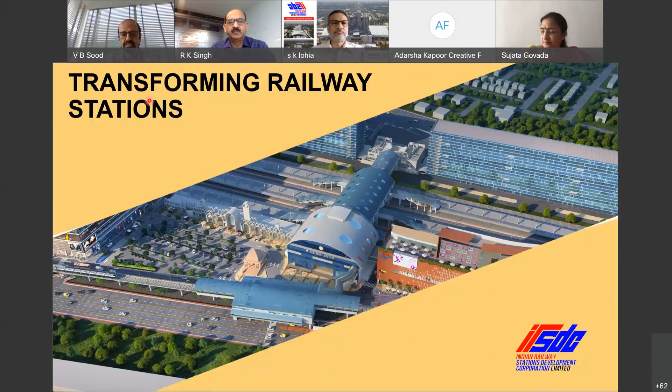Our vision and mission talks about sustainability, use of technology, and many things. And the task that has been given to us is that we have to mobilize the funds from the market itself. So it's a very difficult task, and that calls for a lot of innovation, a lot of listening to the people who are planning the cities, those who are the developers, those who are going to invest in the station, so as to understand those viewpoints and incorporate all of that in our planning.

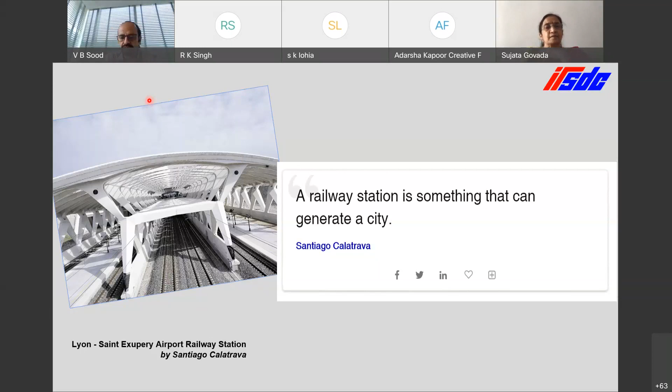This is one of the overarching philosophies, that a station is a very important part of a city. In fact, if the station comes first, it's a nucleus around which the city grows, or a magnet through which the city will gravitate. A station is a very important and integral part of the city, and something which actually serves the city, and of course gets served in turn, but it serves the city very well. People of the city closely identify the stations with the cities, or vice versa. So that close bonding is there, and that is what we are trying to do in our station...

redevelopment. So a bit about IRSDC: it is a joint venture of Rail Land Development Authority, IRCON, and RITES, with shares of 50, 26, 24, and we are around 9.5 years old as a company.

Currently, we are the nodal agency for the station development program as per the approval of the Union Cabinet, and also the main project development agency. We have the powers to approve our plans, layout plans, building plans under Section 11 of the Railways Act 1989. Whatever planning we are doing has to be harmonious with surrounding areas, generally follow national URDPFI principles, and we have to consult urban local bodies to ensure this harmony. Whatever development we are doing is covered in the definition of a railway under Section 11 of the Railway Act, so there is no need for a separate change in land use across India.

It's not required. We have also been given powers as a zonal railway to approve the plans for the station, for the operational infrastructure at the station. So those powers are also available with us, and we have already started working as a planning body.

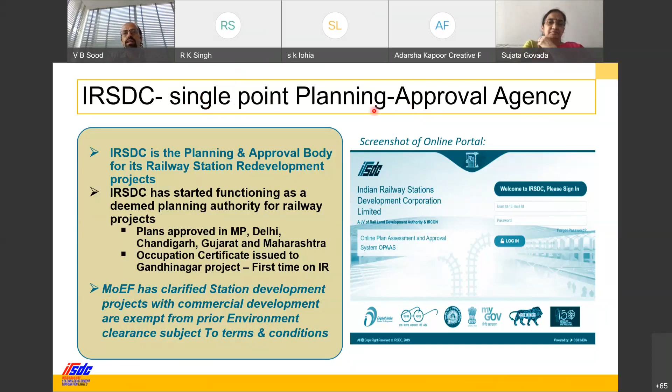One important aspect is that the Ministry of Environment and Forest has clarified that station development along with commercial development falls under the same definition of railway, and is exempt from prior environment clearance. What they have said is that we have to get an environment management plan approved, which is again a simplification. But the net result is that we are now the single point planning and approving agency for station projects.

Now our focus of redevelopment is on the passenger and the city, so a framework of 7 Cs has been made for how we want to go about doing this. We are designing so that it is congestion free - the station road and the area around the station should be congestion free, and the station premises themselves should be congestion free. They should be convenient; there should be conservation of the natural built environment and heritage, cleanliness, communication so people understand the next step to be taken, convergence of modes, and creating a city center.

So it's about the city center character of the railway station. The stations are already at the center of the city, but in most places they don't have the character of a city center. So we're trying to bring in this character so that stations perform multiple functions and not just the transport function. What we are trying to do is organize the external entry to the station.

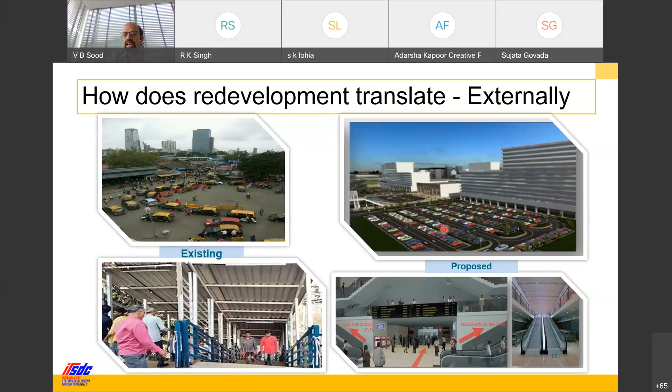And internally, we want to change the scenario where people are waiting on the platform. Rather, they should wait at concourses, at waiting areas removed from the platform, where people are comfortable before the train comes, and then they board the train and go. So we're trying to change this kind of scenario.

This is the idea of congestion-free design, and in this case there is a metro, so we have given an aerial skywalk directly integrating the metro concourse and railway concourse in both directions. People don't need to change levels; they can directly go from station to metro and metro to station. This is one important aspect.

The other is this concourse - a large area where, whether you come from this side or that side, either way you reach this same portion. So all the facilities available here can be used by everybody.

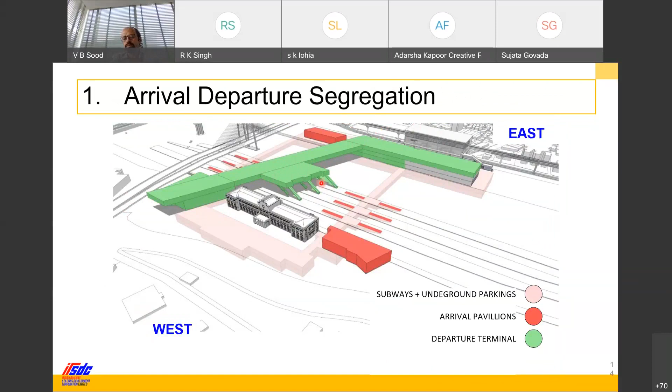So we can see that we have a large number of seats here. These passages are there, these are the gates where people can get down. And then we can have our urinals, the water, some retail, some other facilities, all can be provided on this floor.

This becomes a comfortable place, and this is the image basically of the railway station which people carry, because all others are just transit. This is where people sit if they have time. If they don't have time, they just rush through this part and go.

India being a dry and hot country most of the time, 7-8 months a year - of course it can get cold also, but heat is more of a problem. Cold people can take care of with their clothing, but heat is a big problem. So this helps in countering that, and also it helps in visually connecting all the elements. So this platform, this concourse, all these areas are actually connected together, and the station comes as a unified whole.

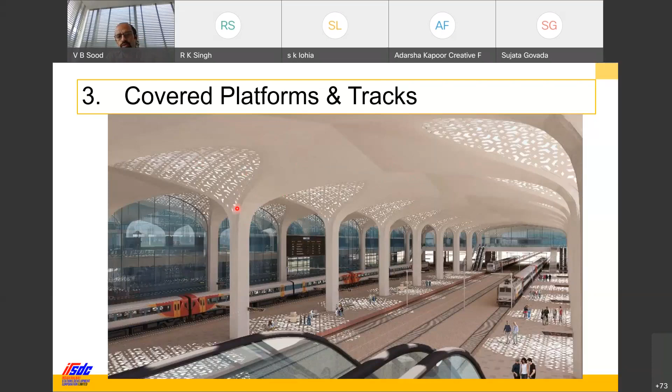So we're just trying to put in some elements so that the design is good, and even a person transiting will appreciate that this is the kind of work done. In this case, this was a heritage station, so the work done here is talking about our thoughtfulness to the aesthetics, to the way the station is presented to the people.

Okay, so a very common question - I don't cover this part, this is Urban Connect, so all of you know this. One concern that almost everybody has is that stations currently are congested, so we are doing more real estate and more development in that area. Will that not lead to more congestion? So we are actually trying to tell everybody that these are not two competing claims, these are not two things which are causing problems to each other.

If we do good planning, then the station complements the real estate because a lot of footfall is there, which the real estate can utilize. And the real estate brings in lots of uses which the passengers can utilize. So ultimately, these commercial functions should add to the passenger experience. But what that requires is one thought process which goes into all the development, and we come up with a comprehensive plan with a thought on how exactly we want to run this whole premises. And then we never lose sight that it is a station, but then the real estate also flourishes. It is not like an afterthought or an appendage which creates problems or issues.

So this is our approach, which we hope will be able to do justice to all the competing claims which are there on the land in the station area.

Our planning process - this is the flow chart of the planning process. So when we start, we collect the data from railway to understand how railway is going to evolve over the next 30, 40, 50 years. Then we see the city - what is the planning of the city as per the master plan bylaws, what the city is trying to do in this area. Then these two things, plus we try to understand the site. We do the surveys of the site, survey of the passenger, survey of the traffic, so how exactly people are using these premises and all other physical features.

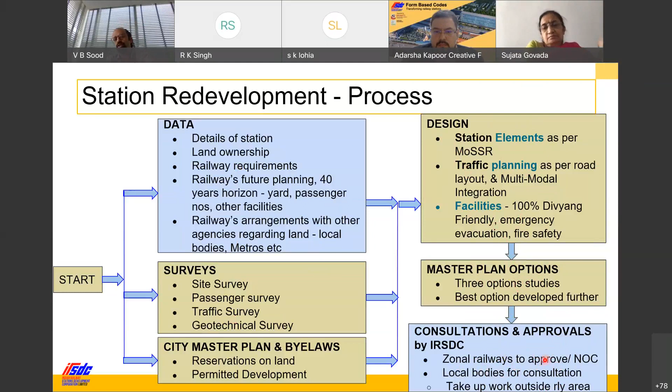We understand that doing whatever we are trying to do is a win-win paradigm. The stations are congested, stations are underutilized. If you want to utilize them properly, this prime asset which is there in the heart of the city, we want it to be a nucleus for development in the surrounding area also. All this development is on the TOD principle, so that the burden on transport infrastructure is reduced.

So this is the fundamental part. We want the station areas with real estate and all should be a welcoming area. It should be a safe area. We should have active streets, eyes on the street, flexible mix of uses. And we want to promote and prioritize pedestrians and non-motorized transport. These are the requirements, and because it's a station area, they are all the more important.

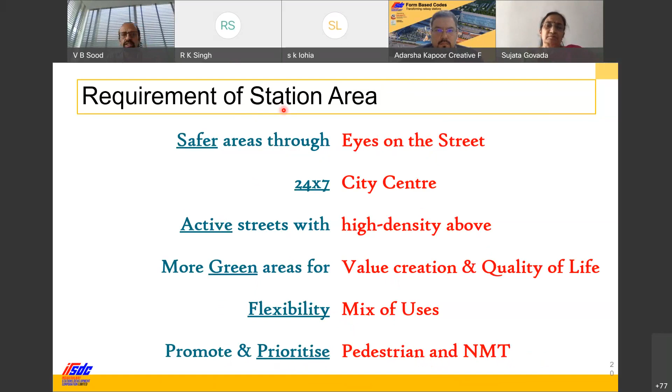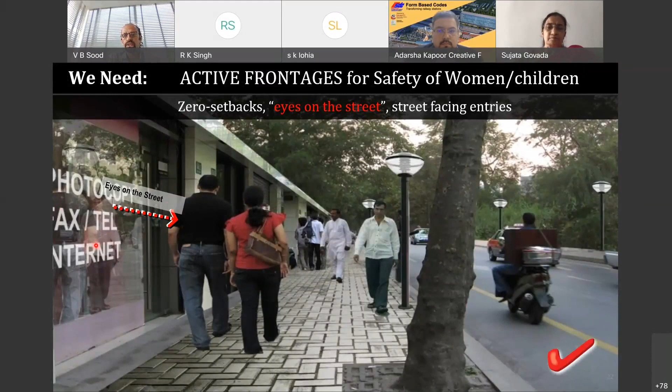Because of these requirements, we had these codes so that the station area develops as per the unique requirements of the station. So there are 6 codes.

One is the handbook for how the station should be planned, how the national TOD policy component should be operationalized in this area. Then form-based codes, which basically convey our vision, whatever we have done in the station or in the whole area, get translated into this requirement as a form-based code. Then there are codes for design, for control of the development in the individual buildings, and green building and heritage — very, very important. So these two codes are for green building and heritage assets.

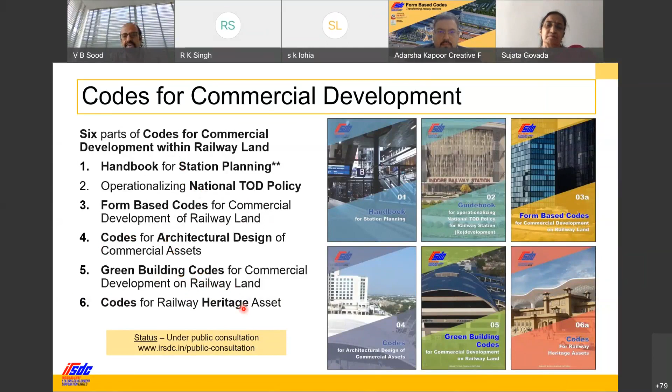So these codes are under consultation, as MD sir was saying. They were launched on 19th of April. We had a very big gathering on that date, more than 1,000 people were there. Then we have already had consultations with the town planners, with the architects, green building consultants, heritage consultants, and today we are doing consultation with the urban designers also.

A couple of projects that we have done, where some of the elements of this vision are already visible. One is this Habibganj, in Bhopal, central India. Here the existing station is there, and we have conceptualized this new station, which is surrounded by these commercial developments all around.

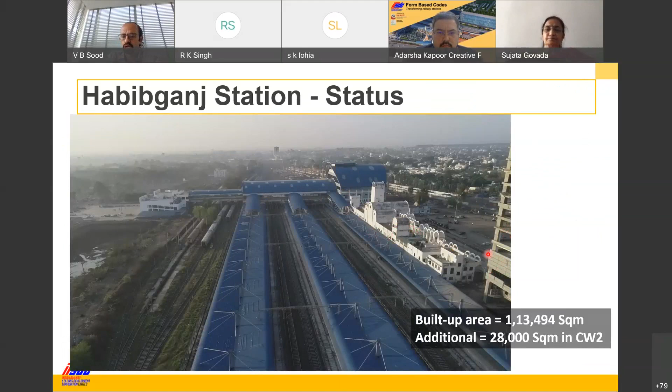This is the station — the first station handed over to a private developer in March 2017. The station has been run by the developer since then, and this is the current photograph. We can see that the new station is almost ready. This is the existing station, and this is the commercial building which has also come up. More views: new building, existing station, and the commercial development.

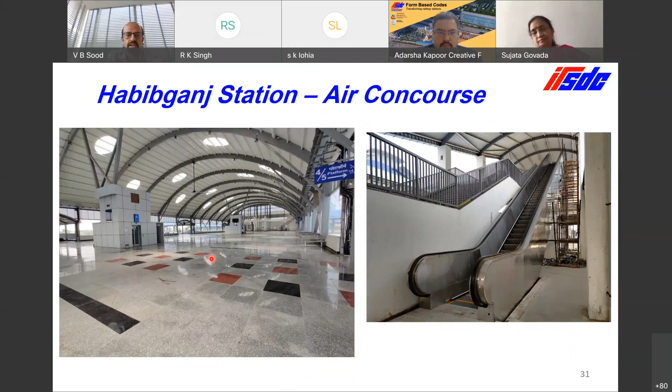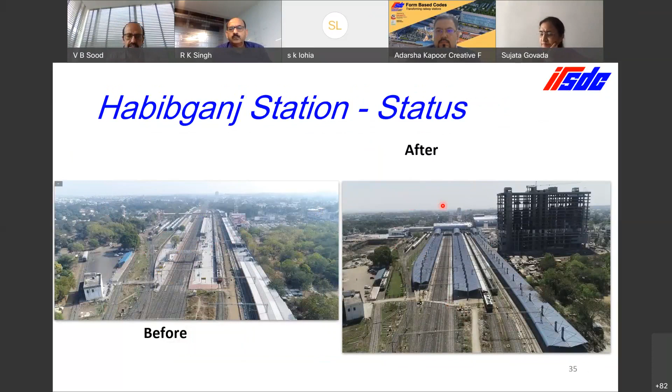We can see the development — how the station that we took over in 2017 looks today. A lot of development has taken place here, and this is the first redeveloped station in India on the lines that we are describing. This is going to be inaugurated, and then we'll take the feedback and adjust the model based on how the passengers are using it.

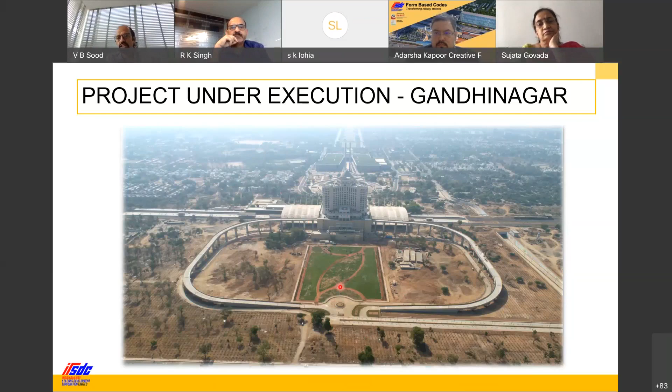Final testing of the different facilities, that is what is going on. And more views—we can see this 99-meter through-roof which covers across all the current and future platforms and tracks. So it spans right through.

And we have got two subways in this case also. This is the level where the concourse is, so we can have the segregation going here also. And the hotel, we can see on the inside.

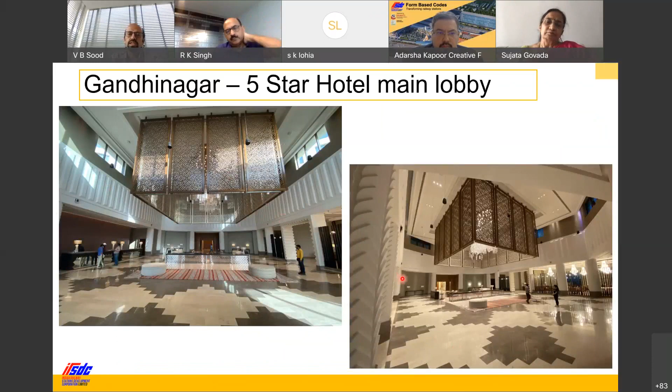This is the hotel, this is the main lobby, and these are the dining areas—holiday dining, lounge. So the station and this hotel are also ready and will go into commercial use next month.

So both these projects are unique, and this is the kind of development that we are seeing. We'll discuss the various elements of these projects in subsequent presentations. Thank you.

Thank you, Mr. Vivek, for briefly telling us about what all is being done in IRSDC, and briefly telling us about our two projects which we have recently completed, that is Habibganj and Gandhinagar.

Our next speaker is Ms. Paromita Roy. She is an urban design and planning expert in IRSDC, presently on deputation from DDA. Paromita Roy is an architect and urban designer with over 20 years of experience leading and implementing large-scale projects across the globe, integrating urban planning with infrastructure and resource management, sustainable mobility, built form design, and economic viability at various scales, embodying a multidisciplinary approach to urban design. She is a specialist and expert in transit-oriented development. I would now invite Ms. Roy to present the form-based approach adopted by IRSDC while making these codes. Over to you, Ms. Romi.

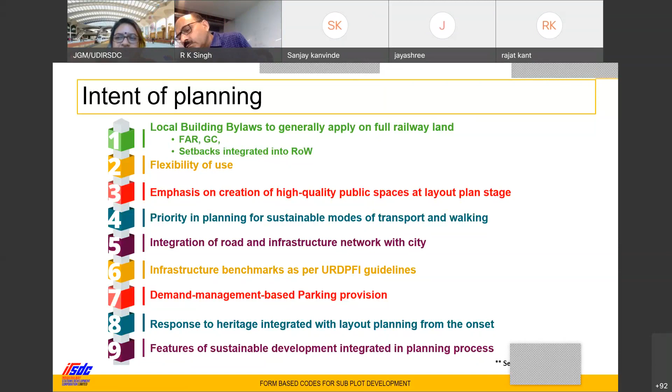It's not just about doing public spaces for the sake of public space, but actually creation of public spaces and regulating and taking away a bit of space from cars parked in front of stations actually adds value to your development, increases the quality of life of passengers, and when people like a place, it's going to have better commercial value.

So this all eventually links up to better commercial value and better quality of life for people. They are both interlinked. Then response to heritage, we had a separate session yesterday, a very long one, about the heritage aspect, and this is again a very important aspect we're looking at in all our plans.

Many of our stations are heritage buildings, old buildings. In some which don't have very high heritage value, we are nicely integrating them into modern buildings, and with the listed heritage buildings, of course, we are restoring them. We have kept very comfortable budgets. We have got heritage consultants who come and do quick audits and give us budgets, and those have been integrated into our overall business plan and as part of our project RFPs. So heritage and refurbishment is also a very serious part of what we are doing.

And last but not least, the sustainable development planning process, which is part of the urban design framework. In fact, IUDI, Arunava, he had come and helped us put this together, and Mriganka and a lot of other urban designers have been helping us behind the scenes, and we are very thankful for that. That has really helped us develop these codes as well.

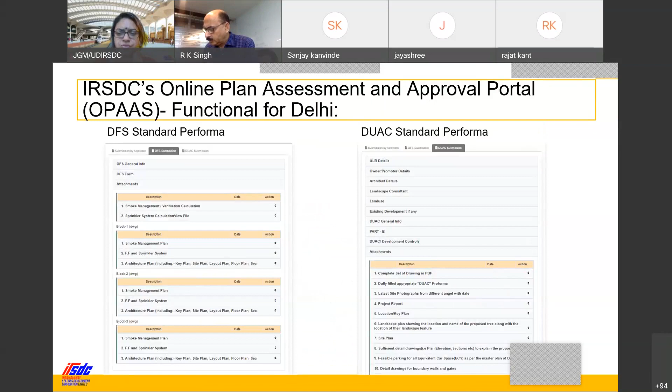So these are the proformas, just a screenshot of that. I'll not get into these details because I think everybody here knows much more about it. I'll quickly take you through the steps I've explained and hand it over to the next speaker.

Of course, it's integrated with the land use, so I'll skip that. Now, how does the bridging happen?

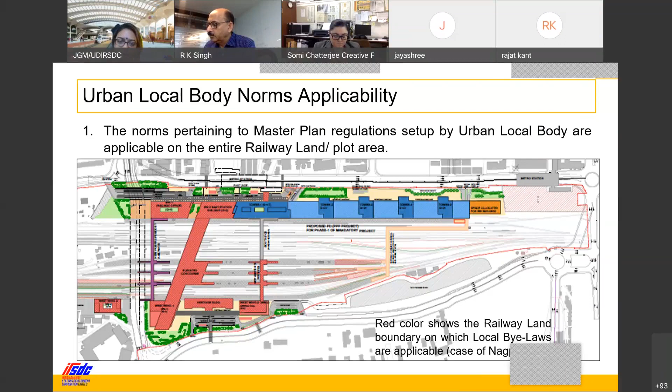Of course, the overall layout is also part of the RFP package, but that is more like what we call mandatory works - roads, greens, and station areas that the concessionaire has to build and maintain on behalf of railways. But the subplots we're talking about are the ones he uses for monetization. Not only monetization, these also have a huge contribution to the quality of space and quality of life in these precincts.

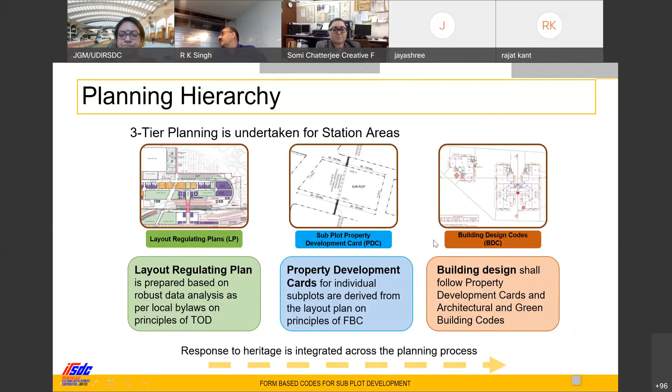We follow a rigorous process of doing surveys, assessments, opportunities and constraints, then come up with the strategies. We generally do around 3 options. After the options are prepared, we take it to the PSMC meeting - there's a plan approval committee in IRSDC - and after that, the committee approves it.

Then we send it to the railways and the local body. This is all based on the urban design framework plan that I mentioned earlier, that has various aspects that we look at, and then the final layout plan of the site is prepared. This is like a graphic tutorial that is there in code number 2, which talks about the process of planning.

Very often we would find consultants would come with just identified plots in the railway land, and then just say, this is for monetization and this is the station. That was a big challenge - we had to put this thought across, that it's not an isolated commercial development and an isolated station development. It is very much seamless. If we don't integrate it with the city, it's neither going to sell, nor is it going to serve the people.

So this graphic process is there in the code, and detailed codes of these aspects are also there in the various codes that are there for publishing. Step by step, connecting to the context, putting in the road network, which connects to the surrounding nodes, the multimodal integration with surrounding nodes like bus, metro, other stuff, often freight also.

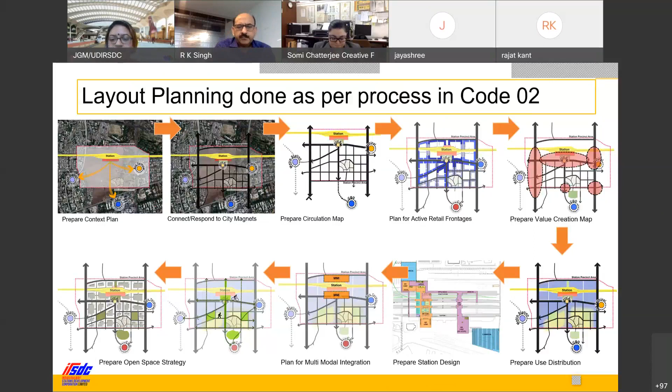We follow a pretty scientific and rigorous process in coming up with the numbers, the sizing, the figures for passengers, and that number impacts the design and the sizing of various aspects within the plan. So then the process of basically coming up with this, which is the urban design scheme, and the layout plan for the project.

The final regulating plans have two levels - the first level, which is the layout plan level, is this overarching level. There are various layers in this. We have devised these layers which are very simplifying, otherwise one single drawing has too much information, so it's difficult to filter out. The person who's making the street may not be interested in looking at what's happening in the subplot. So there is one overall layout plan, and then we also have these layers.

The green layout plan talks about the green layout and also what norms are going - like how much percentage of soft surface, if any commercial is permitted in the green, how much of soft surface, what are the pathways. In this, you can see that we have this came from the urban design framework for the Chandigarh project, for example.

You can see that there's a road network there. I'll use the highlighter. Yeah, so there's the road network here. And through the parks, we have given these pathways because here there are railway offices where a lot of people live - this is a railway colony.

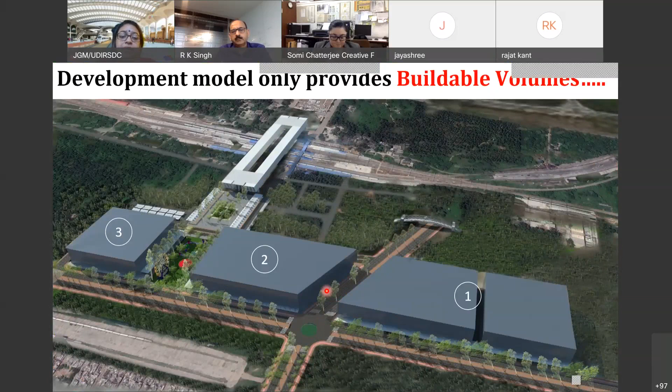Then we come to the property development card, which is at the subplot level, the smaller level that I talked about. For that subplot level, I've just shown the Chandigarh example. So you can see what is going into the code or the RFP, and from that he can make anything out of it eventually.

But we have specified that he has to give an arcade which connects to the station walkway and also responds to the activity happening on the main road. This is drawn, of course, from local things in the Chandigarh RFP.

So we gave him these samples, like the Sector 17 arcades, which connect the entire Sector 17 market and all the buildings in a continuous arcade. So that character is already there. This is part of the form-based rules.

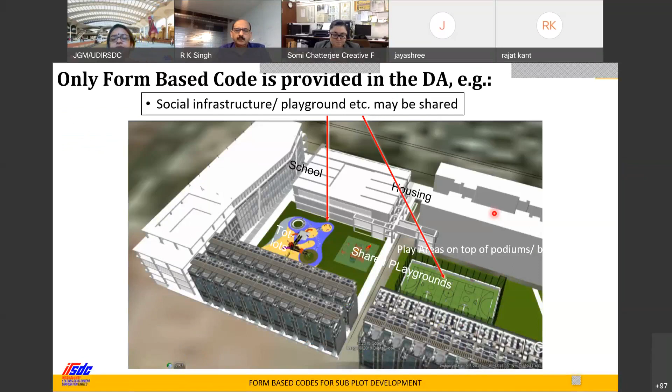Then, allowing sharing of green areas, a school playground and a tot lot or a swimming pool or a tennis court can be shared between the housing and the schools within the same block. These aspects are looked at.

Now, I think if all of you have looked at the property development cards, I'll just hurry up on this because it's a lot of slides.

At the subplot level, the parameters that I mentioned that the buildable volume card has are these five very important parameters which go into our RFP documents. One, of course, is the volume.

This buildable volume defines the amount of development he can do. And there are certain assumptions of ground coverage taken for calculating the optimum amount of built-up area that can go into the plot. And that is also part of the RFP.

Here you can see that in most cases the subplot plot line is the same as the build-to line of the building. Somewhere it is not - in some places we want a gap for some reason. So there the build-to line may not be at the red line, but in most cases it is.

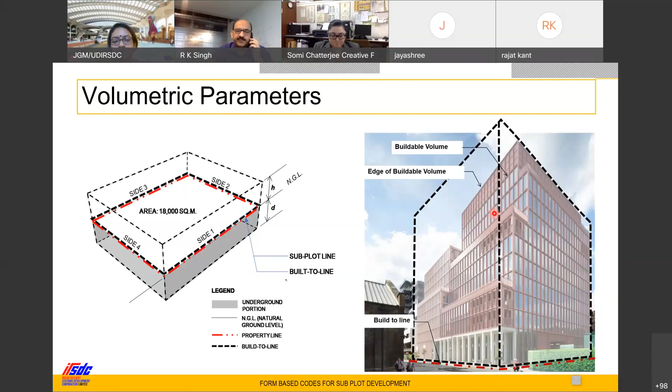Then the second parameter of the form-based code is the edge condition. This has mainly two parameters, the active frontage and the colonnade. So in hot areas, we want, especially where we are expecting passengers coming out of the station and walking through, or general people walking past in heavy numbers...

There we have mandated climatic protection in the form of arcades. This is not always mandated - where heavy footfall is not there, we just write optional. But where heavy footfall is expected, we write it as a mandatory element.

And then same with active frontage, we all know, having retail or active - even if it's residential, active frontage doesn't always mean shops. It can even be residential, but you will need townhomes and buildings which open up to the main arcade or the main street. So your entry has to be from the active frontage side. That's the second parameter.

The third parameter is bridging over ROWs. This is something that was very common traditionally. I don't know how we forgot all these good things that were there in our traditional developments. So they are sort of all being brought back, and as we know, it has so many benefits.

Like in the bottom picture, you can see this is not only connecting two building floor plates, it's also connecting a floor plate or two buildings across the train tracks. So this creates a wonderful interconnected, easy-to-move-around environment for people working in these areas - you may be working here, going for a restaurant there, or living in that hotel, and going for a drink with your friend in the other building.

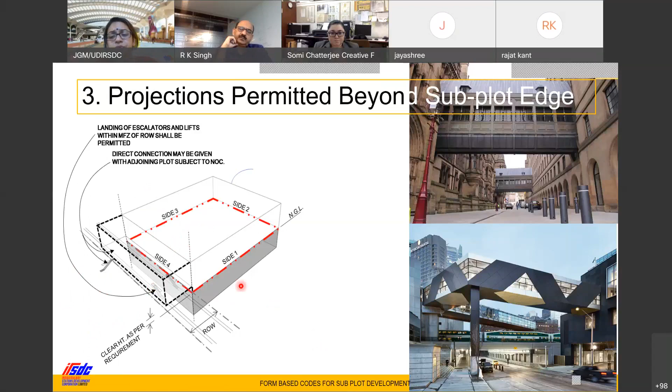The fourth aspect is the wayfinding feature, which includes clock towers and the wonderful things we read about in college. We've been talking about it for decades - the Kevin Lynch aspect of having view corridors and being able to see the station from a distance.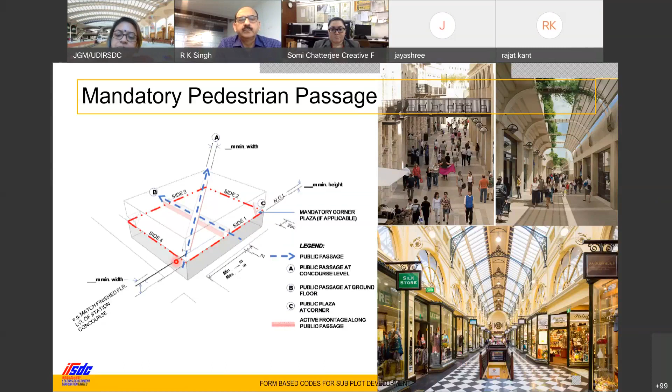Before going home, all the shopping and grocery shopping can be done right there in the station. You simply catch the bus or auto and go home after that. So it's a win-win for everyone. These 5 aspects are part of the form-based codes that are put in our RFPs.

These are just snapshots from the RFP documents, explanatory shots. This code is actually part of the RFP, where we've mentioned that wherever active frontage is mandated, you cannot have a boundary wall. You can have a slightly higher plinth for privacy, but you have to have at least 50% transparency. This demonstrates how that is calculated. These aspects are part of our codes.

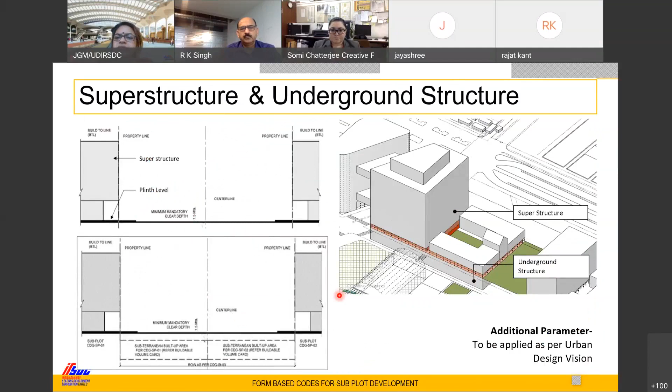Common areas also - what kind of walkways and such, which I showed in the Chandigarh example. Some examples of how the structures are interpreted in this. Street regulation cards I've already explained, but I'll just show you these snapshots of how it works out.

So the key thing is integration. At the layout plan level, all three things we talked about today - the streets, the MPP which is the mandatory pedestrian passages, and the pathways inside parks - they all have to make sense and interlink with each other.

Like we often see in our city, the zebra crossing is in one place and the median cut is somewhere else. That should not happen. So this is a very important part of the layout plan process, which then informs the smaller property development cards that go into the RFP documents.

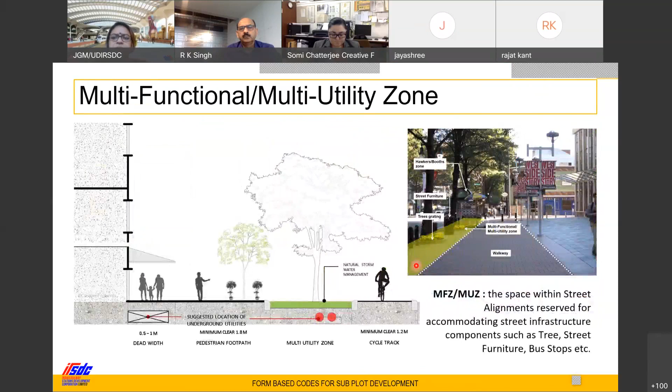Just some illustrations of that. I think all of us know these in fair amount of detail, and a lot of experts are here, so I'm not going to jump into too much detail, but just to show you how we have codified these very generic, general, but very important aspects in our property development cards.

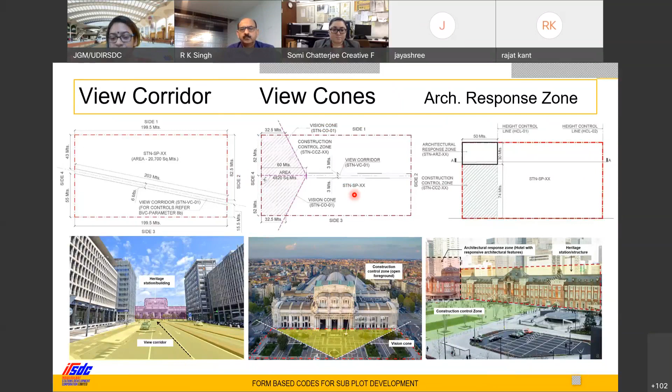So just how the view corridor works - this is very important because for heritage stations, we have had to specify that the vision cone means the plaza must be this size. We've written in our document that you cannot even put parking in a way that blocks the view of the building if it's a heritage or important building, because otherwise cars parked up to 2 meter eye level would block the view - either a boundary wall or a parked car ends up blocking your view of the building. So these are some codes and samples for view cones, height controls, etc.

This is Adarsha. Would you like to talk about the heritage part?

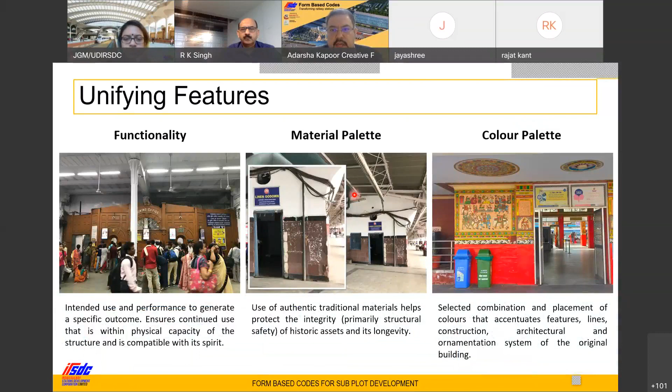Very briefly, these are some of the responses to the heritage stations - you can skip ahead, Somi. I think we'll not go into the details, we've taken a lot of time. So only on specific stations where we need to get into the details of how the surrounding development responds to the heritage station, we'll go into these kinds of details. The idea is that these codes lay out a palette of parameters, and based on the requirements of the station and the subplot, the technical consultant appointed by IRSDC, who leads a team of experts, will go into the details and specify these specific norms for each subplot.

The key thing to note is that heritage is part of the urban design process, and so is landscape. That is an important takeaway I would like to focus on. With that, I will close my presentation. Thank you.

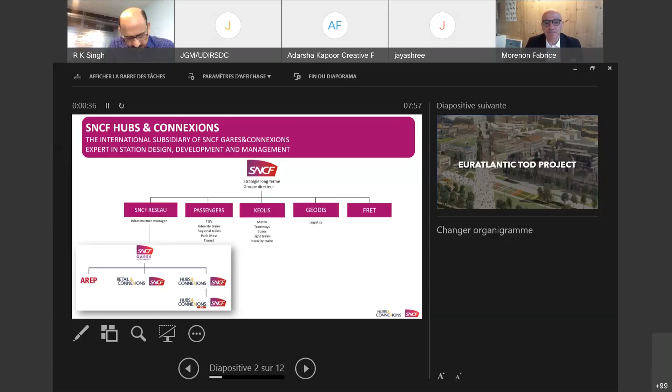As I told you today, I want to discuss and go through the Euratlantic TOD project. It's in France, in the south of France, as you can see here.

Oh yes, here. So here you have Bordeaux, it's in south of France. Here in the middle of France is Paris. Can you see the screen? I'm sorry.

So we decided to refurbish the station for the arrival of the high-speed line in June 2017. As a matter of fact, it was a refurbishment of the station, but also a redevelopment of the whole area around the station. Because when we redevelop a station, we consider not only the building of the station, but we decide to redevelop the whole neighborhood. It's very important to be in this mindset, and I know that you are also in this mindset.

Bordeaux is very interesting because thanks to the high-speed line, now you can connect Paris to Bordeaux with only a 2-hour journey by train. It's very interesting, especially for business travelers who can go almost in a daily journey from Paris to Bordeaux.

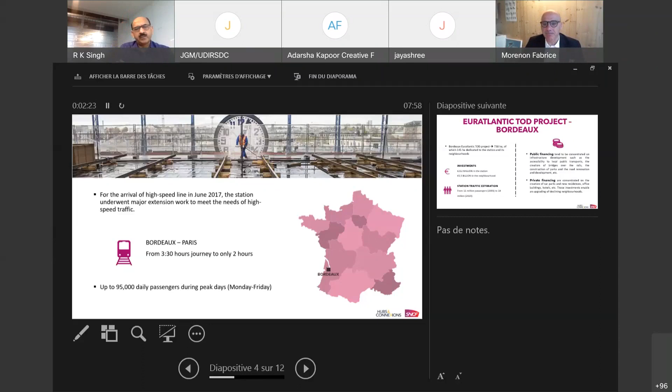So this project, as I told you, is a TOD project of the neighborhood, and in the heart of this project you have the railway station. First of all, it's a big project of 738 hectares, of which 150 hectares are dedicated to the station.

It's also a huge investment, almost 212 million euros invested in the station, and I highlight the figures, almost 5.5 billion euros in the neighborhood. If we were able to invest such amounts of money in the neighborhood, it's because of the driver - the station, because you have this economic driver in the middle of the neighborhood, which is the railway station.

We had estimated the increase of passengers between 2009 and 2020. It's a huge jump, from 11 million passengers per year to 18 million passengers per year.

We have two main means of financing this refurbishment. First of all, it's public financing thanks to local governments, and this public financing aims to develop, for instance, the creation of bridges over the rails, the construction of parks, and renovation work around the station - how to connect smoothly the station to the neighborhood and how to go in or outside the station.

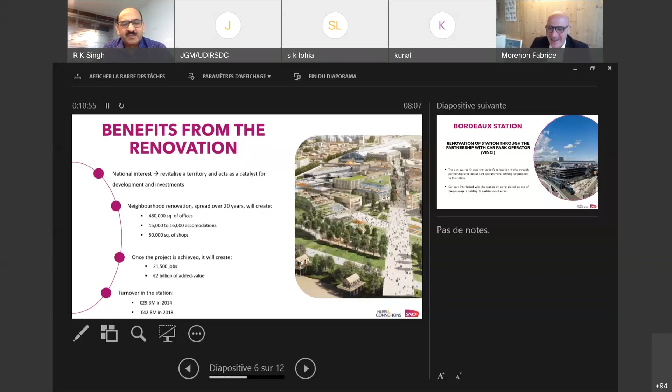40%, it's very, very important. We have, for instance, a 40-year long-term lease between SNCF and Vinci, which is a car park operator. During this 40-year lease, Vinci pays us a rent each year. So we have two benefits: first, an initial investment at the beginning of the refurbishment of 40 million euros, and then each year we also have a small part of the rental of the car park, with a smooth connection between the station and the car park.

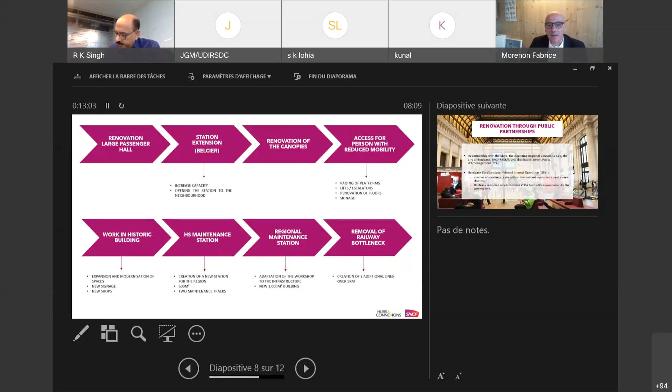So I'm going very briefly - this is the project refurbishment step by step. And now I just want to highlight this.

The renovation was a success because of the key partnerships that we were able to tighten. First of all, we created a kind of SPV, Bordeaux Euratlantique National Interest Operation, which allowed the creation of a business center with an international reputation. This SPV was the place where all the stakeholders were able to discuss the project - on the one hand public actors such as the regional council of Aquitaine and the city of Bordeaux, but also SNCF Réseau Network, SNCF Gares & Connexions, etc. Sometimes all these stakeholders did not share the same point of view, so it was very important to have this kind of SPV to deal with all the issues and stakes. Today, thanks to this, the station is a new gateway of Bordeaux and these regions.

As a conclusion, I just want to give you the main figures and stress that, on the one hand, it was a 95 million euro budget for refurbishing the whole station.

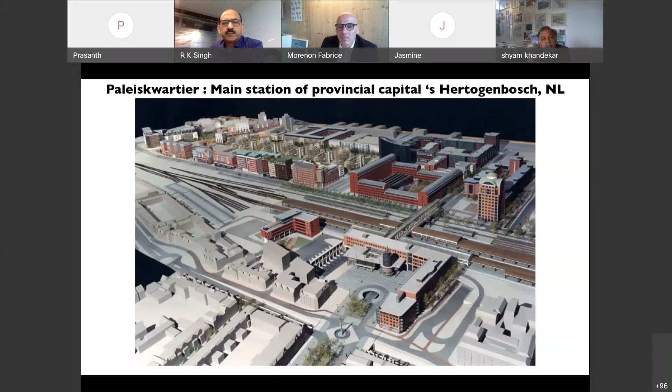If you look at this particular drawing, some of the old sheds have been kept and reused, but in the middle you'll see the footprint of this area as it was. I'm only going to talk about the things important to what I'm discussing. If you look at the footprint on the right side, that is the direction we followed, the urban design vision. Important to notice is that on the eastern and western periphery you see blocks, and in the middle you see some freestanding objects - those are the red footprints. So just keep that in mind, because I'll come to how we got the form-based codes we tried to use to explain this difference in morphology. The idea was an edge with solid blocks, and freestanding objects in the middle.

Can I have the next one, please?

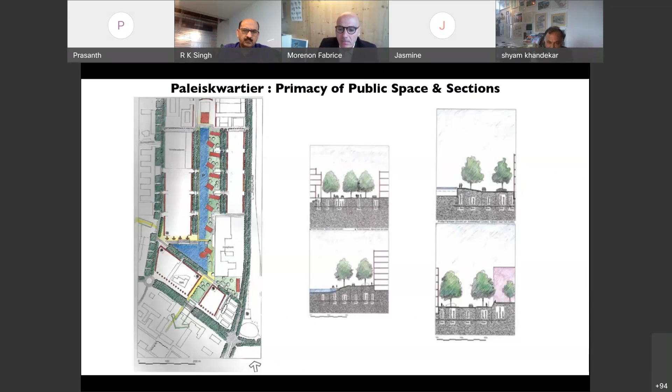And from that, then you go to the subplots. Now these are some of the form-based codes which we used. I want to show these because they're more than form-based codes in a particular way. While this was not a heritage area, we did use issues such as materials and colors, and tried to include them in the codes, because we thought that would give that area an identity. Concentrating on those blocks on the edges, on the right side of this drawing, they're all colored brownish earth color. And in the middle, you see these freestanding blocks, colored white.

In the form-based codes, what we said was that while these blocks on the edges should look solid and feel solid on the ground, the objects which are freestanding should, and please remember this word, look like ballerinas dancing on a floor. So you're trying to add to the form-based code certain emotions. It's not only form. And the result has been, can I have the next slide?

So this is now the central space, which is this large body of water. There's a parking garage under it, by the way. This is 40 centimeters deep, the water. It is used as a solar collector. And these are these freestanding objects which are dancing as ballerinas.

Because we incorporated that, and in the form-based codes gave flexibility, and then held a small competition among 3 architects, we got this design. We wouldn't have got this design by making a form-based code which was very strict. That's what I'm trying to explain.

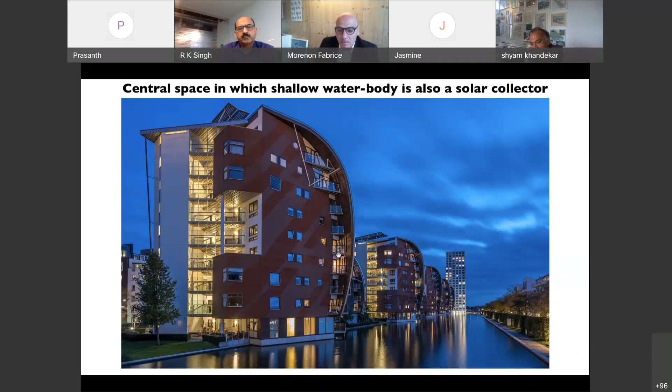Can I have the next slide please? Now this drawing section is very important. If you look at this drawing, there's a red dotted line going horizontally across - that was the original ground level. We had a couple of issues we wanted to solve. We wanted to put the parking under the buildings without making them basement, because the water table level, shown with a blue line, was very close to the ground level.

We also had a lot of rubble from the old buildings, which was not contaminated, which we could reuse on the site. So we reused it to raise the central part of the site and then put parking under it. So 1.30 meters became our new level of the site. Under it, we put the parking so it did not hit the water table, so it was relatively cheap. The third advantage was that people standing in the central area could look over the peripheral roads across to other parts of the city.

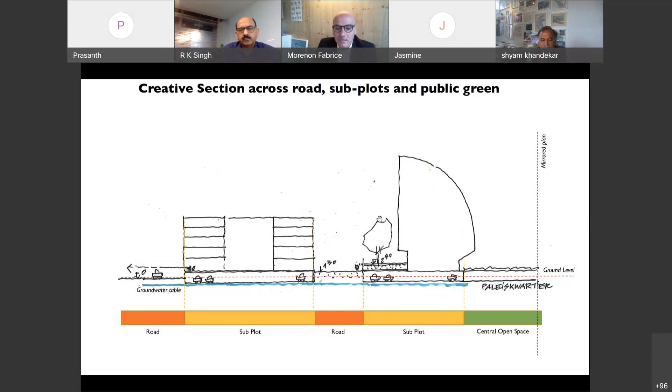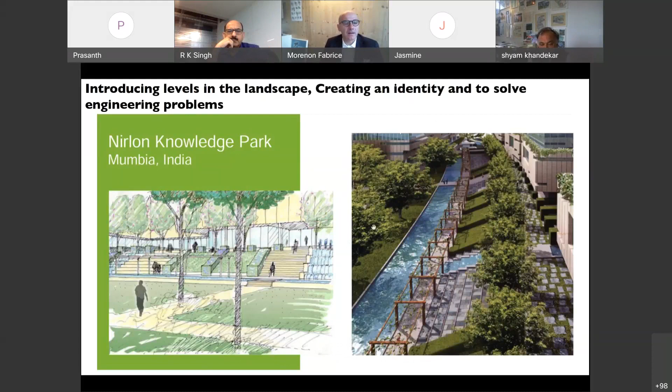This is another one. Here you see the sloping ground going up and steps. There are two other slides of the same, we'll just go quickly through it.

Yeah, this is some festival happening there yesterday. Next one, those steps being used to sit and use. And now the section again.

So again here, the important thing was that while we had done the basic layout regulating plan, before going to the buildings, we first concentrated on the public space. At the same time, we were trying to figure out what we could do to reduce costs.

One of the problems here was that the rock was very close to the ground, so we raised the parking level above ground, which you see on the left side, and then used the central park area, which is green, to climb up to that area which became the fire tender lane, but actually works as a park. This particular section has added to the unique identity of the place.

It has reduced the cost of development, and at the same time it has created a real estate value which is phenomenal, because this project, now about 4 years back, was bought by GIC for $300 million. It was an old industrial site.

What I'm trying to say is designing public space first drives up the prices. It creates better design, and that is the only way to do it. Don't leave it till the end, because a building has value because it faces a nice public space, besides what it can do on its plot.

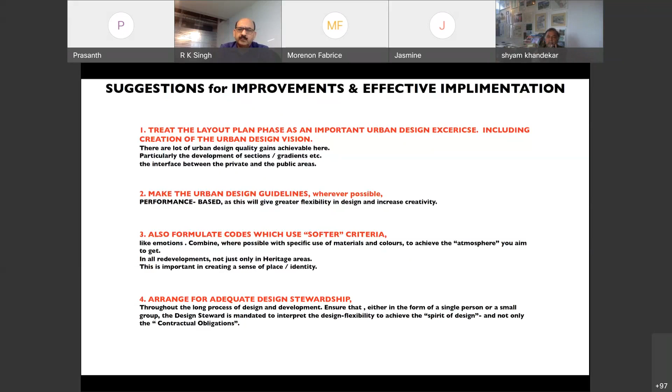You can also use materials and colors to give identity, and please use it in form-based codes. And finally, if you give flexibility, you have to make sure that somebody with authority is there, either a single person or two people, who can guide it through the process.

You may be surprised to hear, but I have been for 30 years—I've not only done the master plan for this particular project, but I'm guiding it all through. The same applies at Nirlon, that is going on for now 12 years. So I have many projects of urban design where this applies.

You are involved as a steward, design steward, a supervisor, or whatever you call it—give one or two people the mandate to guide it so that they can ensure the spirit of design is kept, and not just the letter of the contractual obligation. Now, thank you.

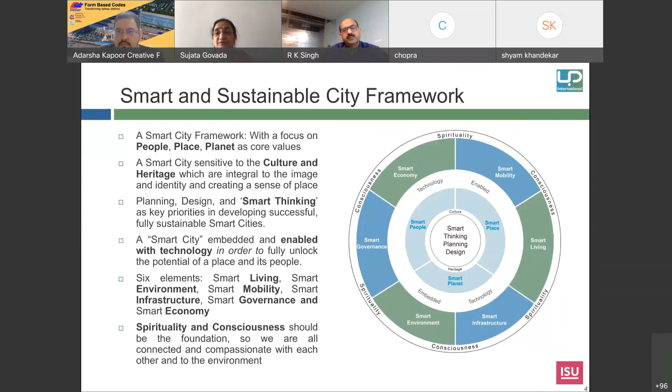As part of that, we've developed this framework. I'm happy to see that heritage was mentioned—I would also add culture to it. Our framework focuses on people, place, and planet, but also keeps in mind culture and heritage. It's technology-enabled and focuses on six elements: living, mobility, environment, infrastructure, governance, and economy. But it's based on a spirituality and consciousness foundation, because we need to be compassionate not only to each other, but also to the planet, to ensure truly sustainable development going forward.

Transit-oriented development—I don't need to go through this since you're already embarking on it. It's very important, and I'm glad Railways is doing it. For those who don't know much about Hong Kong, it's a high-density development where TOD is done quite well, sometimes too well, to the point it becomes development-oriented transit. It has less than 8 million population, but only 24% of the land is actually built up. Car ownership is low, and transit ridership is high—more than 90% of the city is covered by transit.

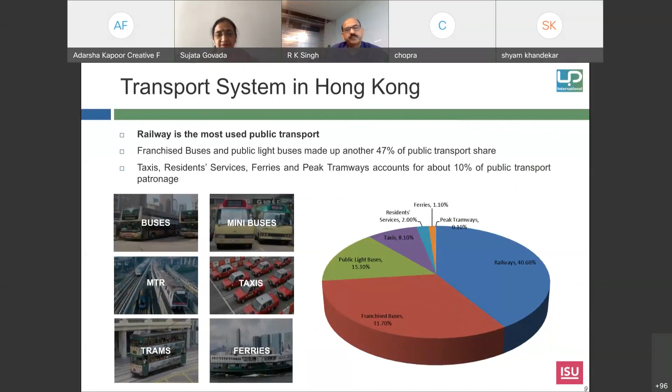Besides the MTR, which is the metro, there are also buses, trams, minibuses, and taxis. Ferries are used too, even though it's a coastal city—the ferry usage is very little, it could be much more. The transit ridership is high. The MTR capitalizes on station area development to not only increase the catchment but also make it profitable and subsidize the development of the lines. There is integrated development, along with public transport interchanges, where multiple modes are present so people can easily transit from one to the other.

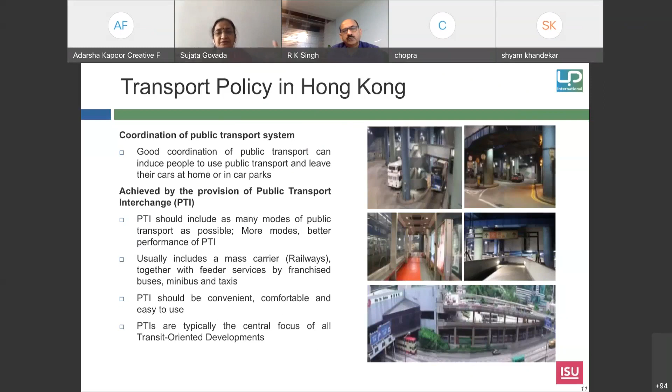Know the fact that the KCRC was there before, started in 1910, but MTR only came in the late 70s, and they were both merged together in 2007. KCR used to do only the China transit before.

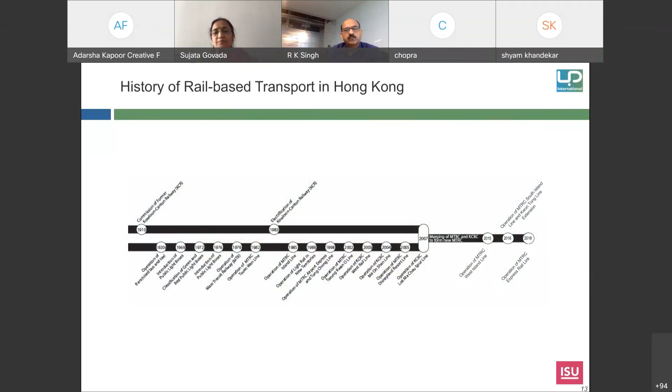Now they're all merged together, and these are some of the new lines they're doing: West Island Line, Kwun Tong Line, South Island Line, which goes to the south of Hong Kong. West Island Line goes into the older part of Hong Kong where they've become more sensitive. And the Sha Tin Central link is really connecting to the north, almost closer to Shenzhen.

And the express rail cut down the travel time from Hong Kong to Shenzhen from 45 minutes to 14 minutes, and to Guangzhou from 2 hours to 47 minutes. Also important is the Hong Kong-Zhuhai-Macau Bridge.

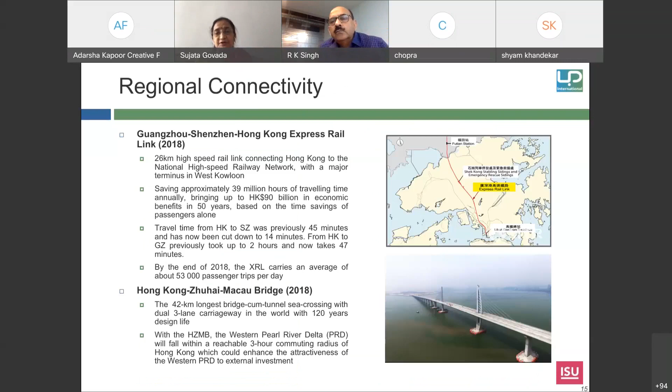The MTR business model has been not only the operations and management and development of the railway line with proper operation and management, but also ensuring profitability, not only with property development, but also capitalizing on advertising, branding, and marketing that happens within and around the stations. People criticize that there are too many malls in these MTR developments, but I think some form of commercial development is important, just not to go overboard.

Sustainability is another thing they're looking into. This is in the presentation I'll send, you can look at the details later.

The railway and property development model is what they've actually looked into, where policy, process, project, and organization are important. Unlike with railways elsewhere, permissions are still done by the town planning board, but in consent with the MTR. So if MTR is developing something, they still need to go to the town planning board to get permissions and submit everything. I think with railways they've made it easier, so that you can approve your own stations, which is good.

There are also external factors related to the urban context and other things out of their hand, but also government policies, which are internal factors.

Every station-related development has to have higher density, and they should discourage higher densities elsewhere in the vicinity, so that the catchment for stations is increased and there is footfall in the stations immediately. That is the main governing factor, and that led to other problems too, which I'll share in a minute.

So for transit-oriented development, they've looked at density, the right type of density. Again I'll emphasize this: distance to transit, diversity in terms of different mix of land uses, and accessibility - I need to stress it has to have pedestrian accessibility, because it can very easily become development-oriented transit if you're not careful. And design is very important, with attention to detail.

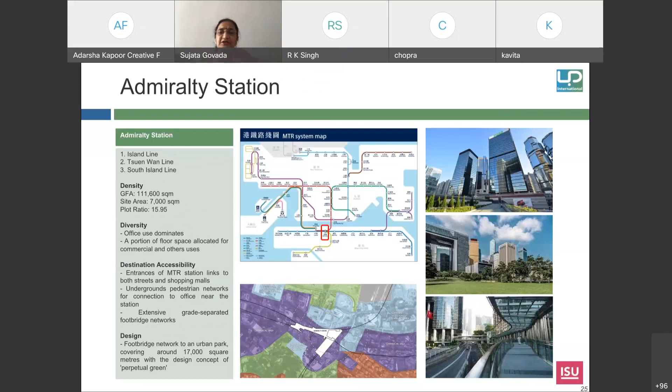But as MTR became more next-generation, the Admiralty station is actually quite an interchange station because a lot of lines connect there, and it's quite busy. They've done it quite well because it also takes the level changes into account and has a good amount of open space within the area.

The Kowloon station, I think, is where MTR got a bit greedy, or too development-focused, and went too far into development. The plot ratio is at 8.1, but the problem came with the entire site - over 14 hectares - having 100% site coverage with that plot ratio, so there are many towers, and the open space you're seeing is only at the podium level, 7th floor. At the ground level it is completely segregated, and that's where it got into trouble - also because it's too luxury-oriented and didn't cater to the needs of normal people going to offices and needing lunch.

And they had to do other things to retrofit later on, even having minibuses go at lunchtime to nearby places like Jordan, where you can get a cheap, reasonable meal.

Lohas Park is over a depot site, so some rail yards can be covered and made into proper developments, but I wouldn't recommend exactly like the MTR. Maybe Hudson Yards in the US is a pretty good example, done recently, though it has its own issues.

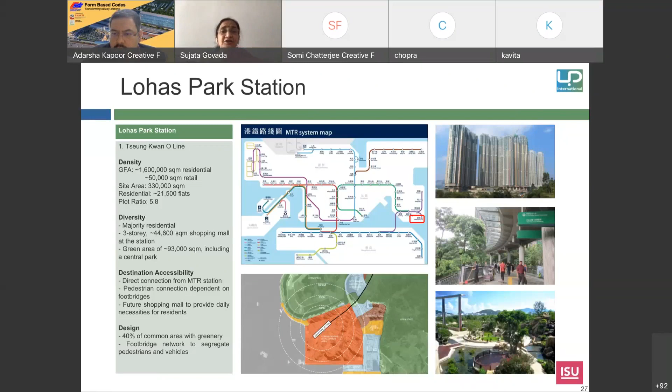But here in Lohas Park, they had 50 almost identical towers, which I would disagree with as an urban designer. Again, the landscape is on the podium only, and the integration at ground level is not very good. It's a large site, over 30 hectares, with 100% site coverage again.

Sai Ying Pun station is more on the newer lines, but in an older neighborhood. So MTR had to become very sensitive, do community engagement, take feedback from the community, and create station exits closer to the neighborhood and waterfront so people can actually use the station and the amenities around it, because the connections become used not only to enter the station, but also other parts of the neighborhood. That's something you want to keep in mind.

Some challenges with TOD are maintaining human scale, because you can go overboard very quickly. Walkability and connectivity, I'm glad your codes mention those. Integrating larger scale development, if you do podium development, it has to be terraced to the ground level so street level interaction is there. And it should be truly transit and pedestrian oriented development, TPOD, rather than development-oriented transit.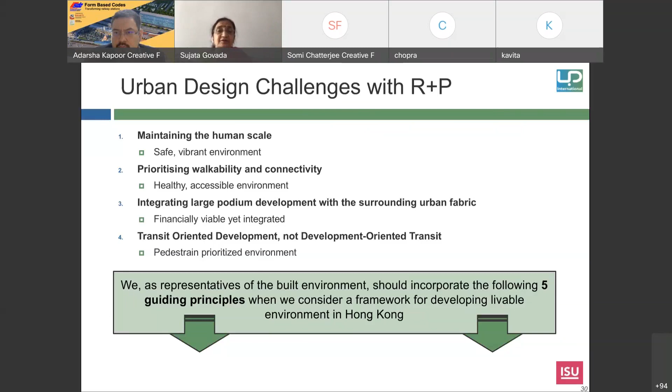This is from London, Oxford Circus, where it used to be like the image on the left - no reason for it to be like that. The crossing should be more like what they've done now, shown on the right, which really gives pedestrian priority.

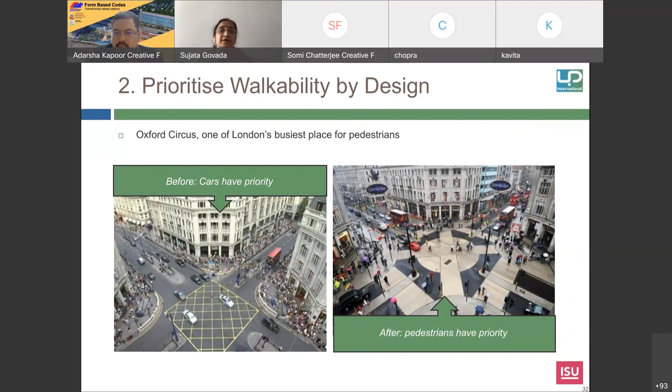The Kowloon station is an example of a standalone TOD on the left with no integration, which is a problem. But if it's integrated, people from adjacent areas can come to the station and vice versa, and the station becomes much more accessible, not only from one line to another, but within the neighborhood as well, which is very important.

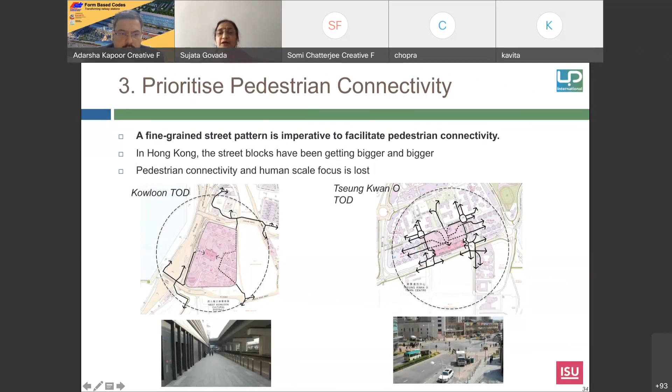So prioritize pedestrian connectivity. As shown, Kowloon station has limited pedestrian connections, whereas Tseung Kwan O, another newer station, has much more. And also multimodal transit integration.

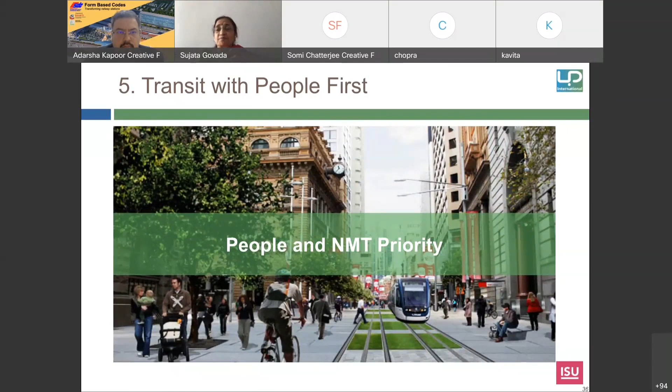So people and NMT priority should be there. And I agree with the previous speaker, Shyam, that landscape has to be built in with the urban design, not as an afterthought. And urban design shouldn't be an afterthought either after planning has been done.

This is the 10 principles we did to actually challenge the Hong Kong government as well as the MTR, so that they listen to future developments and become more sensitive.

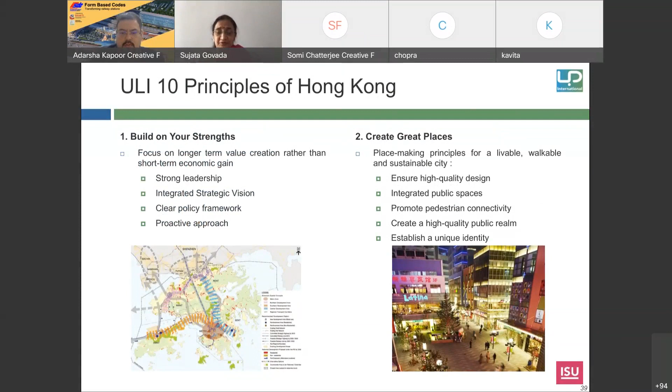Just briefly, building on your strengths - these could be applicable at other places too. Create great places - this becomes key. Extending the urban grid - a lot of times the urban grid is compromised, and I call it the disappearing of the urban grid, a usual phenomena which you should not let happen.

And also open up the public space, not only at ground level, but also multiple levels. Sometimes it's given to private sector initiatives and then it's closed off. So you want to really keep it open throughout, not only during design, but also when it's actually built.

Integrate infrastructure, because based on the infrastructure, it actually dictates the type of development that happens. So if you have really wide roads, it is going to dictate more inward-looking development. So that I think is important to be aware of.

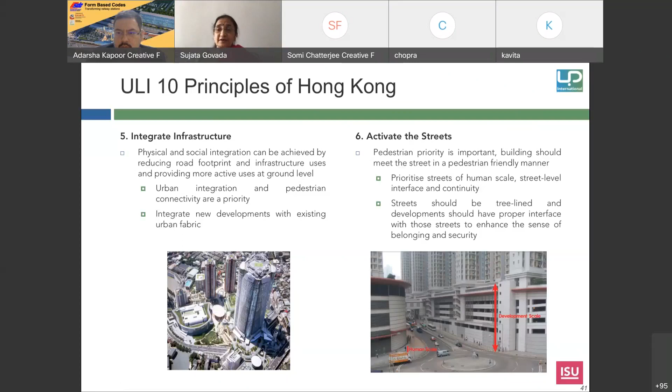So streets need to be more human scale, more transparent, connected. And this activating the streets, as this example shows - this is the development scale, this is the pedestrian scale, and most of these are blank walls. You are making sure through your codes not to make that happen, because it's not okay. And I've heard this - keeping codes flexible.

I think this is key, important. Wherever it is for the public good, you want to make it flexible. Wherever it is actually detrimental to the city and the public and the people, then you want to be stricter and make sure it is actually enforced. So you don't want to be too rigid for the wrong reasons.

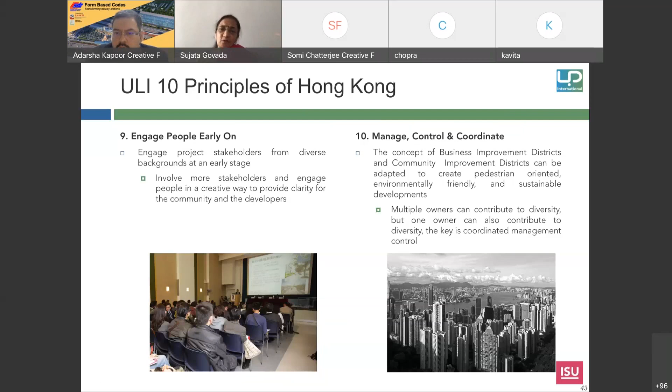Promote sustainability, but please go beyond buildings. Go to the neighborhood scale and actually engage people not only early on, but throughout the process, because it's important. You'll never know what kind of insights you hear from people, because once the station is open and the development is open, you can get feedback on how it's actually working. That's important too. And whether it is done by one owner or multiple owners or multiple players, I think managing, controlling, and coordinating in a proper way is important.

These were the principles we developed together with the MTR, the government, academia, and the community, and the various stakeholders. The government was hesitant in the beginning, but now they follow it.

These are some of the lessons and key takeaways, I would say. I think even when you're doing all this station development, make sure the railway operations and the maintenance are actually good and of higher standards. So raise the bar, even at the railway operations level, having convenient transfers and efficient multimodal interchanges.

And I agree with Mr. Shyam Khandekar saying that you need to think about the public space even before you get into the sublots, and the enhancement of the surrounding area. You don't need to focus just on the stations, but see if IRSDC can actually be the driver to make change for the better in the cities, because that's how MTR has done it in some of the areas.

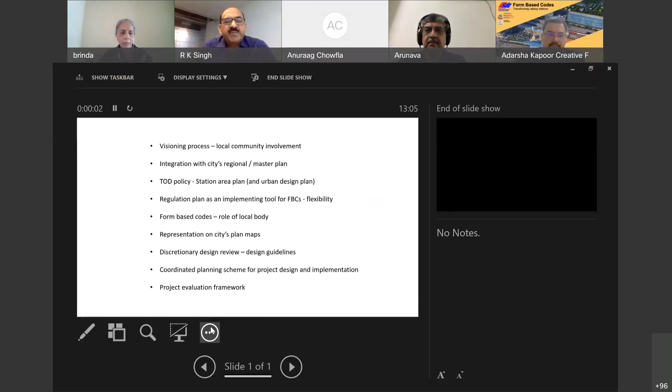I have to mention that a lot of points I'm planning to speak about today have already been covered by a few people, and I really would like to thank Ms. Sujata for the fleeting mention of Portland, because a lot of what I want to present today comes from my experience having worked in Portland on transit-oriented development, particularly station area plans.

I know I can't cover all of these points, but specifically, I would like to mention that the visioning process mentioned in the documents, as one of the requirements of a vision plan, would be the crux and core of how you could engage the local community and create a vision that represents local needs, as well as form a basis for identifying certain form-based codes useful for representing the local contextual situation and contextual design features within the station area.

My second point is regarding integration with the city's regional or master plan. A good example is how station areas can be integrated within the city master plan, where the station could take on a role of becoming a city center, a regional center, or even a local commercial hub, depending on its location and the size of the plots available in and around it. Station areas can also look towards the city's growth strategy, or even the regional growth strategy, to understand how they can integrate themselves within the growth management plan for the city.

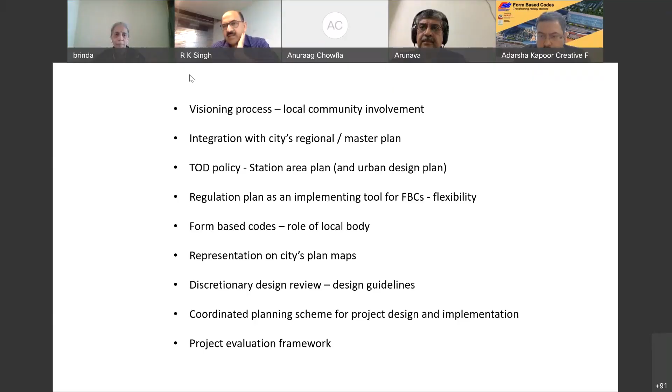Our next panelist is Seetha Raghupathy, CEO and Principal Urban Designer of Seagull Studio, a master planning and architecture practice based in Chennai, India. She is also a senior consultant for the World Bank, the Asian Development Bank, and the CITIIS project with the National Institute of Urban Affairs, India. Ms. Seetha specializes in master planning and urban design with more than 14 years of extensive experience in project design and delivery across India, Singapore, Thailand, Malaysia, Indonesia, Myanmar, and USA. Her areas of expertise include township, mixed-use, airports, infill, urban revitalization, TOD, urban waterfronts, public housing, and development of detailed urban design guidelines. So over to you, ma'am.

Right, thank you. Hope everybody can see me and hear me well. First of all, at the outset, a big congratulations to the IRSDC team for putting together a very robust framework for station redevelopment, certainly a first of its kind in India, placing urban design at the core of the development agenda. By integrating best practices in urban design and renewal with infrastructure building and revenue-focused commercial development, it brings together the public and private through a very good approach.